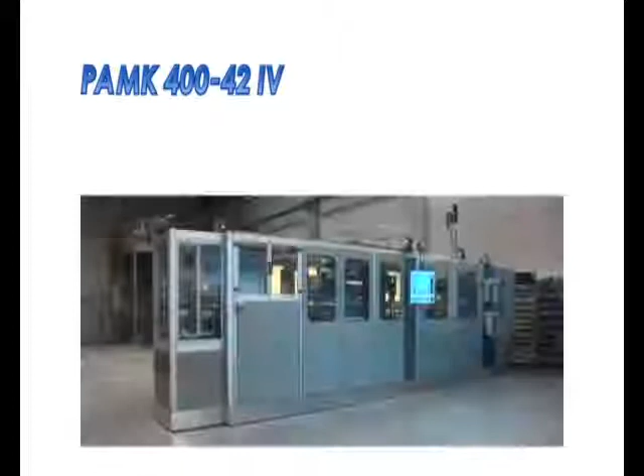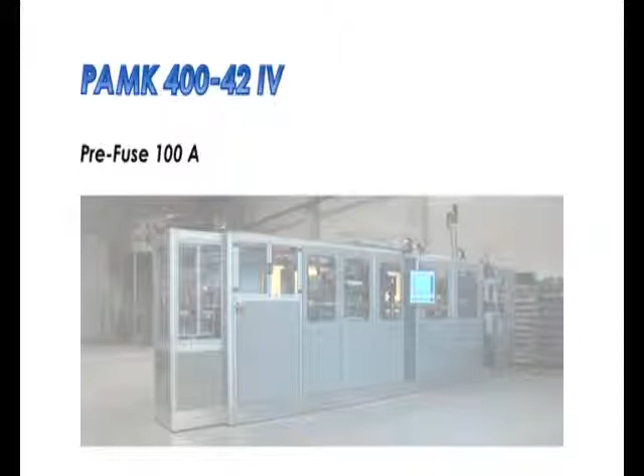The PAMK 400-42 IV is a fully automated high-pressure forming machine to form 3D formed parts from printed plastic film.

The film stacked in the film magazine is positioned on pallets by a loading robot, heated in the heating module, formed in the high-pressure forming module, trimmed in the trim module, and stored by an unloading robot.

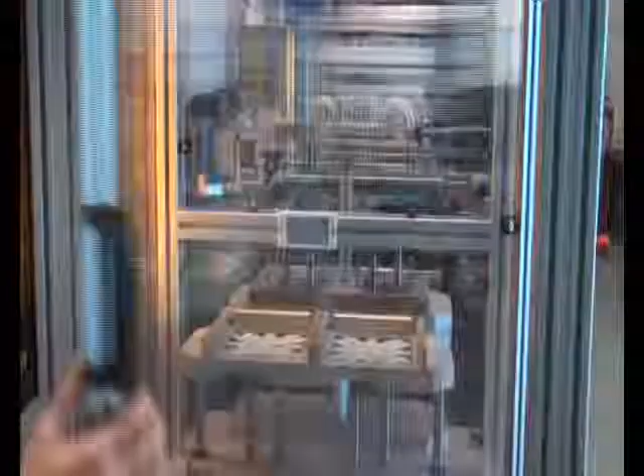The design of the turntable magazine enables refilling of the film magazine without interrupting the production process of the machine.

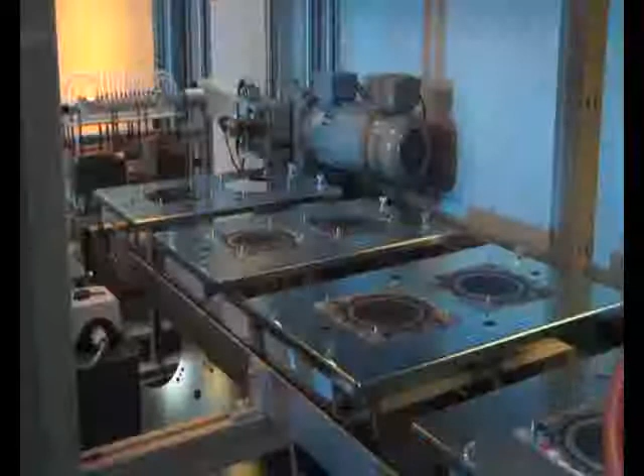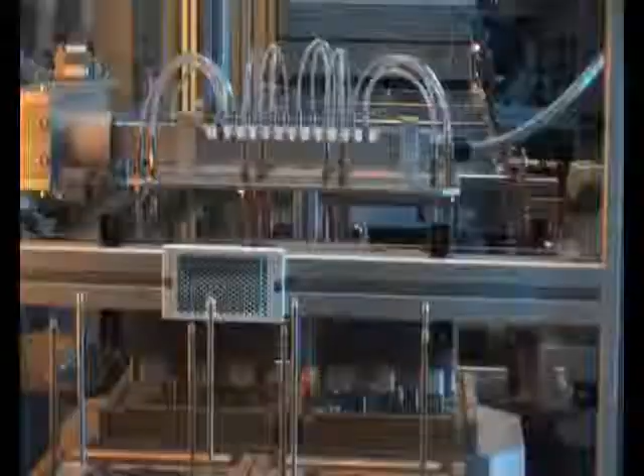The loading robot takes each single film from the stack and places it on a pallet. The pallets and the film are then clocked through the machine by a transport chain and pass the individual modules.

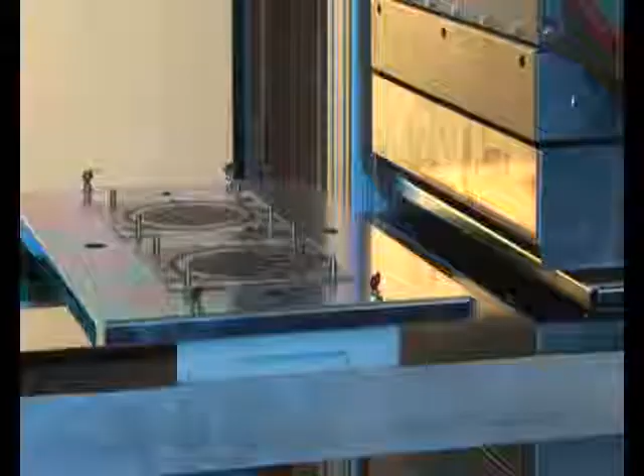The machine has 3 heating modules to warm up the printed film carefully but sufficient for the forming process. The 3 heating zones are equipped with 42 ceramic elements each at the upper and lower heaters.

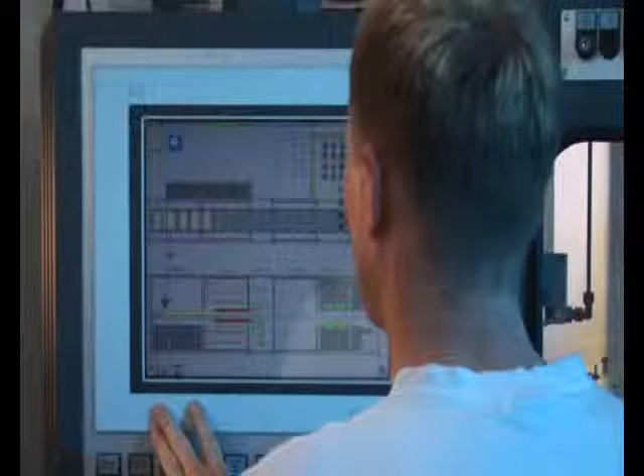The first 2 heating zones are pre-warming modules. At the main heating zone, located right before the high-pressure forming module, the power of each ceramic heating element can be changed individually to ensure perfect warming of each kind of printed film.

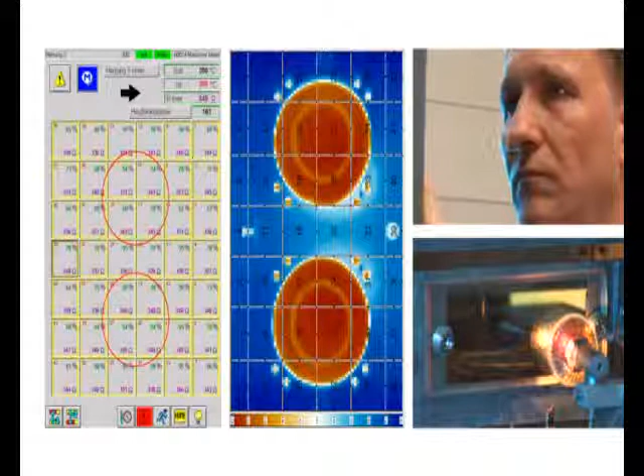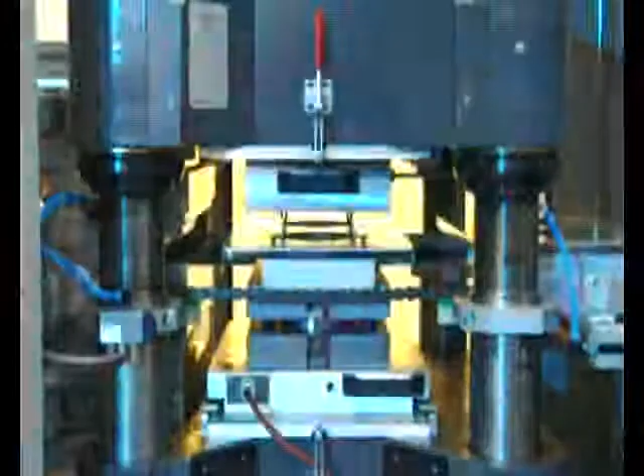At the high-pressure forming module, the warmed film is smoothly pre-aligned to the molding form before the high pressure molds the film in its final shape.

In the high-pressure forming process, the surface of the film is in contact only with high-pressure air of up to 300 bars. The pressure, volume, and the flow speed of the air are adjustable, as well as the opening and closing speed of the molding form.

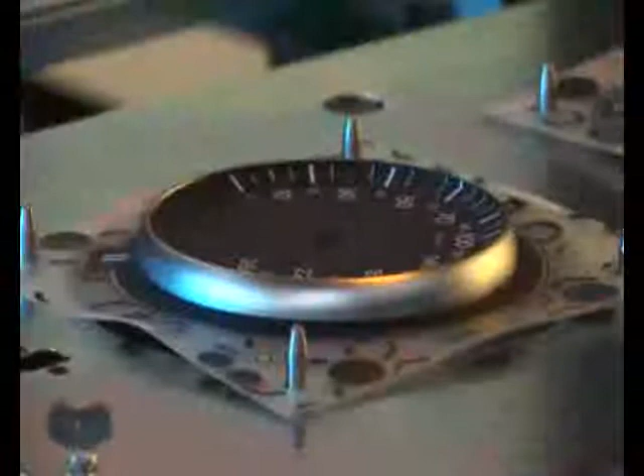All foils, but especially foils with undercut contours, can be lifted for smooth ejection from the mold with low-pressure air while the form module opens.

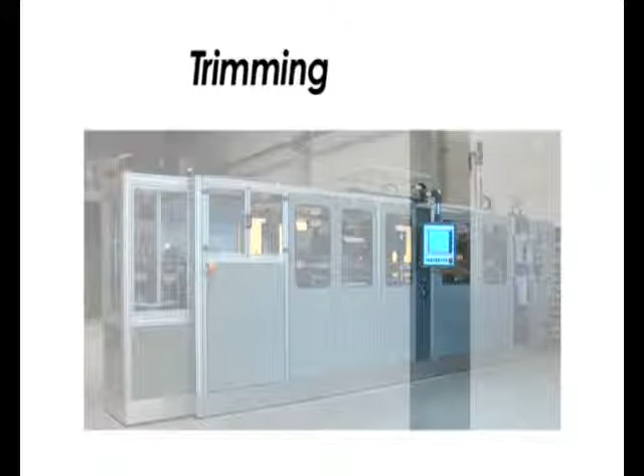The high-pressure forming process by Niebling is a no-contact, isostatic forming process with high pressure up to 300 bar. This results in high surface density and stability of the foil, as well as preservation of the surface structure and optical characteristics of the foil.

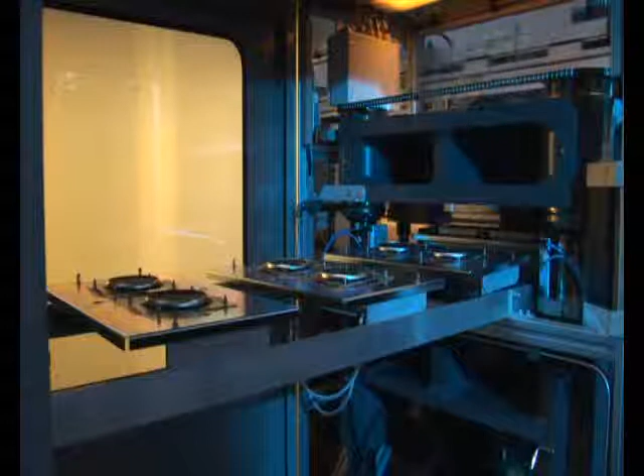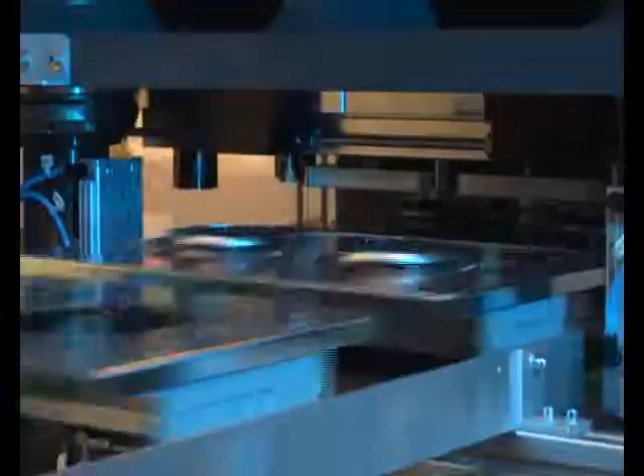The printing colors keep their brilliancy. Precise motifs, like speedometer scales, are transferred accurately and free from distortion. The high-pressure forming process by Niebling allows the use of hard-coated films as well.

A vision system for an optical quality check can be installed after the high-pressure forming module.

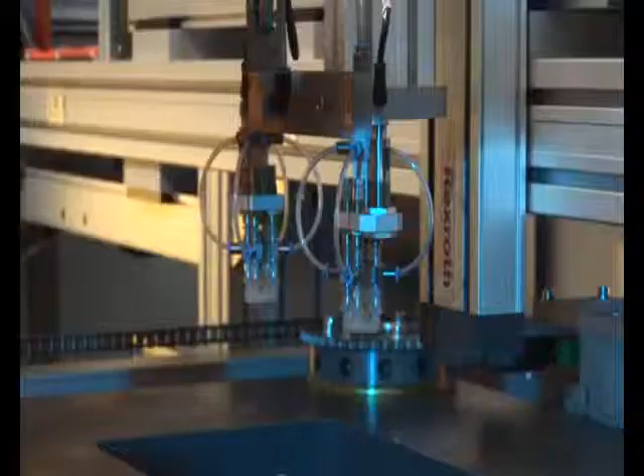Even complex cuts can be realized with the trimming module, as the module is able to carry out 2 vertical cuts simultaneously. The first cutting tool cuts the outer contour, the second tool the remaining inside cut.

The finished part is removed from the trim module by an integrated ejector and a gripper. The cutting tools can be removed and exchanged very quickly, as they are fixed by a hydraulic system.

The first unit of the unloading robot removes the formed and trimmed product from the cutting tool and places the product onto a platform.